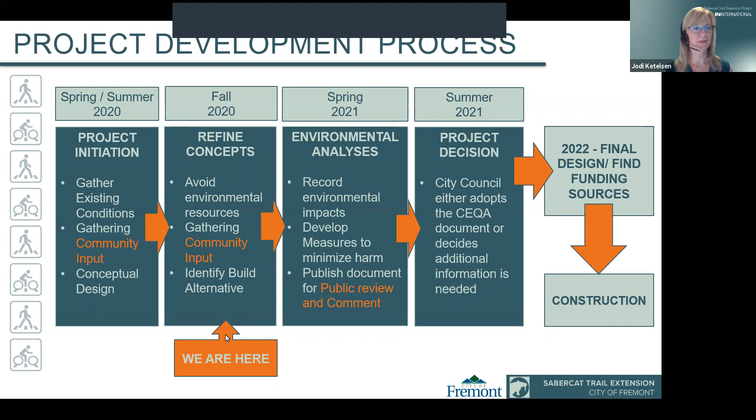So even though this is our second meeting, as you can see, there are more opportunities to be heard throughout the process. So let's dive right in.

The project setting: what we've tried to do here is accentuate key elements that are on the ground that we're working with. First and foremost, Sabercat Historical Park on our right is an incredible resource. The trail and the park itself are very loved, and there's been a vision to connect that over the I-80, I-680 freeway area. As you can see on the west side of the I-680, there's a large Caltrans right-of-way, which is still in use today.

But also bisecting that property is the Hayward Fault Zone. This is something we're very cognizant of. In fact, the city has rightfully reserved this area as not buildable—so it's a greenway. Something like a path that doesn't have a structure can very well be accommodated within that zone, but other structures are advised to be outside of it.

As we proceed further west, we have the future East Bay Greenway, which is already being planned to connect to the north as part of the future Irvington BART station. Right at the Washington Boulevard area, there are plans on how it will connect in and through the station, and eventually in the future it would continue all the way down Osgood Road.

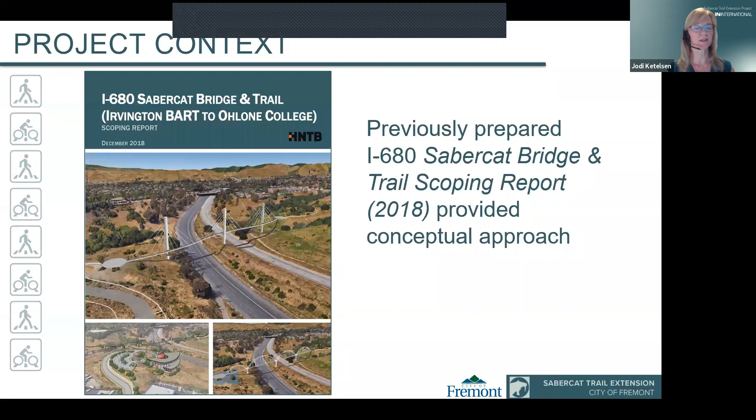So what we did in June, for those who weren't here, was present this scoping report, prepared and published in December 2018. It provided an overview, or a vision, for this project, and that's what we started with—and what we presented in June—so we could understand the vision in more detail, and understand what the public and the residents who live closest feel about this project, to give us some direction.

In that scoping report was exactly what I tried to convey here: a vision for a trail that would cross over the Union Pacific BART rail corridor, connect down at Blacow Road, cross Osgood Road, and proceed eastward into the I-680 right-of-way, which is a large mound that has been growing through the development of nearby freeway projects. It started with the construction of I-680, but has also been augmented over time.

This West Bridge landing to the middle of your screen becomes somewhat of a plaza as it continues over a large bridge over the freeway, having to have clearance and trying not to impede any of the circulation there, being outside of the shoulders, and then landing at the same grade with the park, so that all of this trail could be ADA accessible, meaning the slopes would not be steeper than a 5% grade.

There is also a vision as part of this trail to incorporate, or at least have some linkage to, the Saber-Cat Historical Park, a paleontological museum, so that one could visit the museum and then also visit the park, where these paleontological resources have been found, marking the value of that to this community. It really has made a difference in the paleontological history of how these fossils have been documented, and they are actually known for this community as the Irvingtonian era.

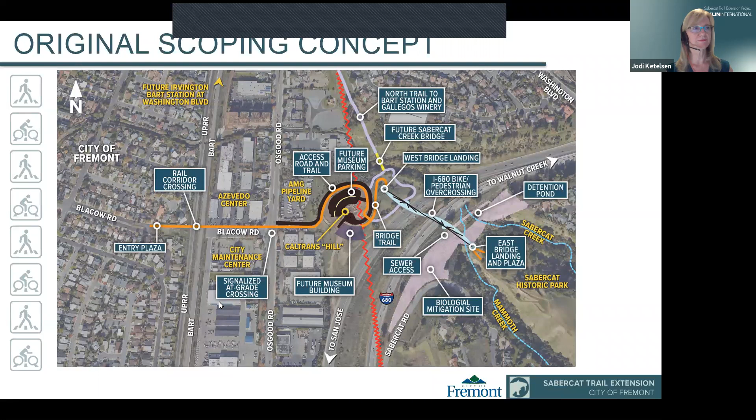We'll talk now about what we received from the public during that June period of time. We received comments during the public meeting, and we also posted a survey on the web, which was filled out by over 40, I believe 46, individuals. Thank you very much for the time you spent to provide us that input. After that meeting, we received emails and letters, and all of that has been culminated into a meeting summary and a survey summary that you can look at and review on the web. We're here today to talk about how those comments have actually influenced and are reflected in the project designs we've created to date.

For brevity right now, I'm going to review some of the major themes, and there will be more detail about the public comments as we talk about the project. So for everyone's understanding of the big themes, we heard there was considerable concern about the suitability of the existing Sabercat Trail inside Sabercat Historical Park, and how our planned extension might influence whether that would be compatible or not. The city is going to talk a little bit about that in subsequent slides.

Safety was another theme brought up quite often. Some individuals were interested in lighting and others were not. What were the hours of operation? Is it going to be an ADA accessible trail? Yes, it is, definitely. There is a lot of interest in the Paleontological Museum and how it will serve this community, and we're delighted to know there's a lot of community support for that. We'll talk more about how that is evolving right now through the project and through discussions with Caltrans.

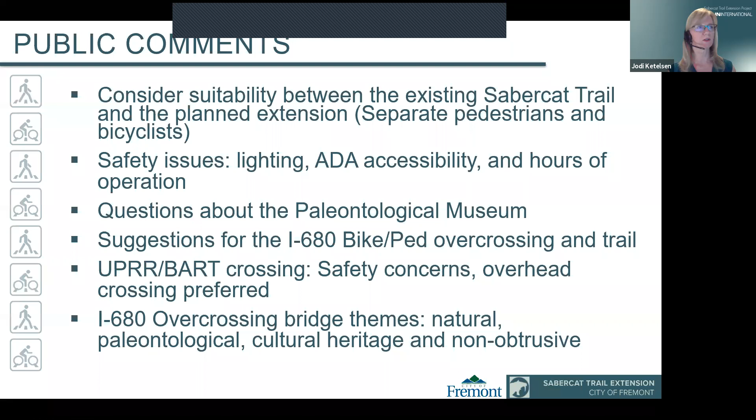So let me give you an overview again. I started from the Saber-Cat Park and went west. As you can see, the existing trail is dashed on this slide, and we would connect into it on a paved road.

There's an East Plaza, a spot identified as not as noisy. It's a little distance from the freeway, and you can stand there and still look over the entire East Bay without the freeway noise.

We've put that plaza a bit distant from the bridge, but the bridge allows you to have other views and connect over to the west, where on that mound we proceed along the more riparian portion of the I-680 right of way before we descend down.

There's a mound there, so we're descending down to Osgood. There we have the steep crossing where we delineate exactly where pedestrians and bicycles are separated in demarked asphalt, and then it continues over to the overhead bridge over the rail crossing.

Those are the areas we're going to focus on today. But again, as I noted earlier, the North Trail crosses Sabercat Creek in a small prefabricated bridge.

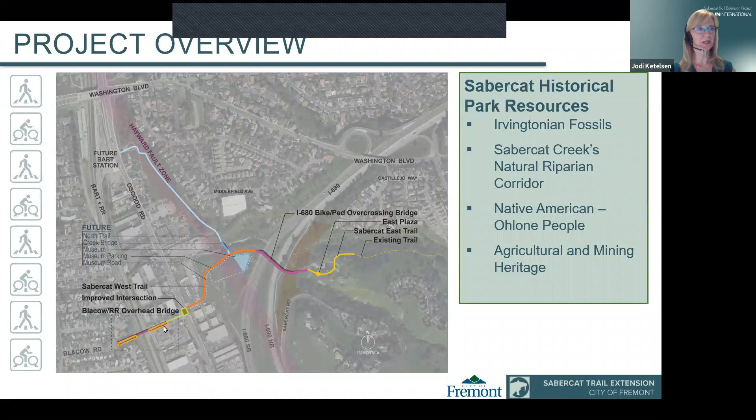But we're going to focus on the major structures along this route. First, I'd like to talk about some public concerns, and Hans is going to help me address how we think about the existing Sabercat Creek Trail.

Thank you, Jodi. One thing we heard from many folks in past meetings was the question about the suitability of the existing Saber-Cat Trail within the park. As you can see in these pictures, there are some areas of the trail that are quite narrow. The issue is, if we're going to open this up to greater use, is the existing trail sufficient? Our conclusion has been that it is not sufficient.

So included in the project now are plans to do a mitigation plan on the existing trail so that it is wider and safer to accommodate a mix of uses—people out for a recreational stroll, and others that may be biking through the area. We'll be looking at ways we can treat that.

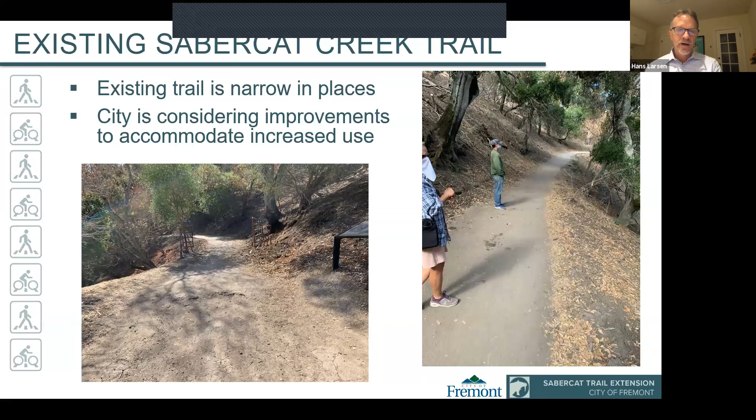It's very likely we may be moving to a 12-foot paved standard with additional room on the side for people jogging or walking their dogs, so future trail corridors would be wider. We'll be looking at improvements on the existing Saber-Cat corridor through the lens of these new standards and the expected use we would have. We hope we'll be able to address that concern.

The other thing that's come up is the variable speed of folks coming through here. We've heard concerns that folks out for a stroll want to enjoy the nice environment of the park, while also having folks passing through on a bike do so in a safe and calm manner. So we're also looking at trail calming elements that would control for folks on bikes from coming through at an excessive speed.

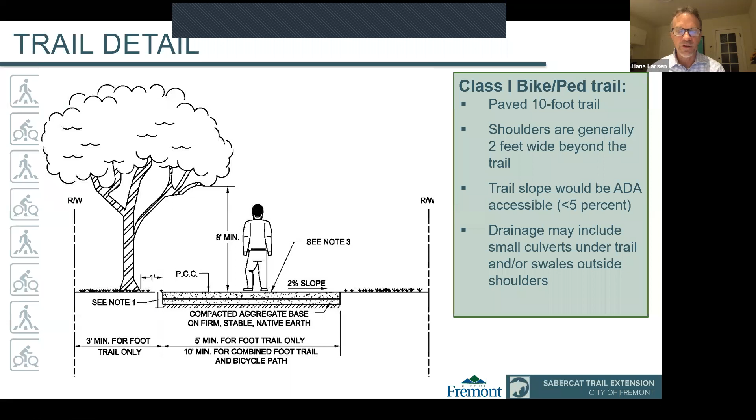There are some things in the corridor now, such as these cattle gates, that people have to go around and slow down for. That's an example of some existing calming that's out there, but we'll be taking a much closer look at those details as part of the project, to ensure a pleasant and safe environment for all users of the area. Next slide, please.

So another idea that we received, and we very much appreciate this, is a suggestion to expand the access of the new bridge over 680 to include other corridors and neighborhoods. What this illustrates is a suggestion to connect the bridge to the existing Sabercat Road and the Pine Avenue neighborhoods to the south. There have been a couple of suggestions on how to do that, and these are two examples. We think that's a good idea, worth further study, so we're including it as part of our review of the project scope.

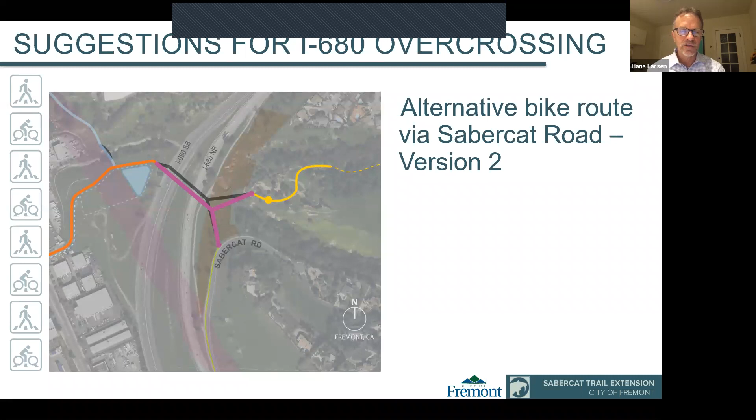We'll be evaluating that in terms of scope and cost and any issues that may be associated with that concept. So again, another example of community input that we're looking to address.

The third item I wanted to mention is the accommodation of a museum as part of the project. In our initial planning, we were looking at placing a museum on the Caltrans property just west of 680, thinking this vacant piece of land up on the hill would be a good spot for the museum.

As we've done further coordination with Caltrans, we've come into a number of complications around possibly using that land. It's part of the I-680 freeway corridor, part of the operating right-of-way on a federal interstate route, and the space is actively being used for other Caltrans purposes. There may be an issue that this land isn't available, or it would take a very long time to get approval for it. So we are separating the issues between the museum location and the planning for the bridge and the trail, so that one doesn't hang up the other.

But in the event that we're not able to place the museum at that location, we are looking at a couple of other options, illustrated here on this exhibit. One is at the corner of Osgood and Blacow, which would have access to the trail. The other would be up closer to the Irvington BART station near the Gallegos Winery ruins, with access off the northern trail.

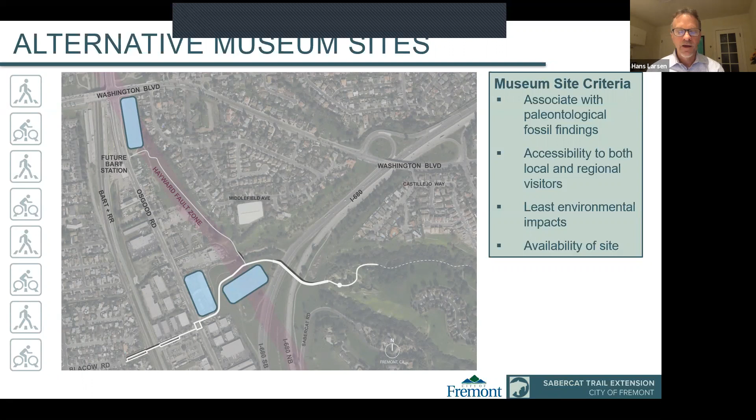So the intent is to plan a museum in the area, and we wanted to share that there are some other alternatives we're considering. We'll be looking at them from a variety of angles, and we'd love to hear any input you all have tonight about any of these alternatives.

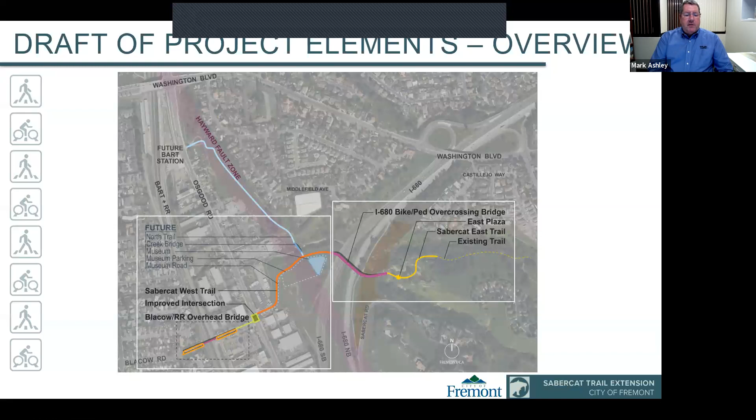Good evening, everybody. Once again, my name is Mark Ashley, and I'm working with the design team as a bridge engineer. I'm going to talk a little bit about the structures and get into more detail about the alignment we're showing here, which is our first evolution since the scoping report that Jodi talked about earlier. I'll start on the west side this time, then we'll move over to the east side. Next slide, Jodi.

So here we're zoomed in on the west side. You can see where our alignment starts at the turnaround on Blacow Road, west of the railroad corridor. We're going to cross the railroad — I'll talk about that in a second — and proceed along the other side of Blacow Road, with a protected bicycle and pedestrian intersection at Osgood. This is also where we would interface with the future East Bay Greenway Trail, which would be along the west side of Osgood.

Then our trail would extend over to the Caltrans right-of-way that Hans just finished describing. It's a triangular piece of open land being used right now for Caltrans earthwork operations for 680 projects and other projects in the area.

So what we're trying to do is align the path — Jodi, if you go back — along the perimeter of that property, the west leg and then the north leg. That allows us to leave as much space as possible for Caltrans' continued earthwork operations. We are going to need to get their permission to have the trail pass through the state right-of-way.

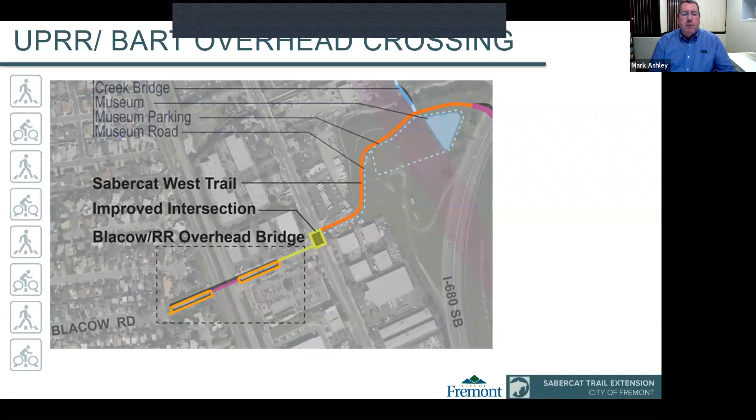You can see the Blacow turnaround. We'd start the path more or less in the middle of that to stay as far away from private properties as possible. We then would have to cross the railroad tracks.

In the last meeting, we presented two options: going under or going over. We've opened a dialogue with both BART and Union Pacific Railroad, and what we found is really the only thing they'd consider in this case is going over. They're very concerned about the impact of tunneling under their tracks and what effect that might have on their operations. So that's what we're showing, what we're moving forward with at this point.

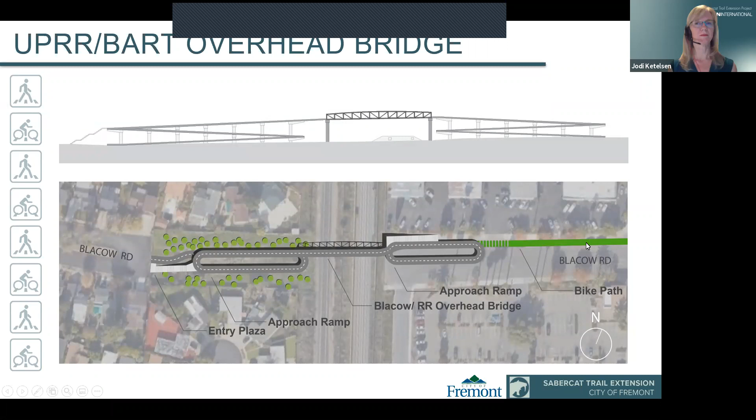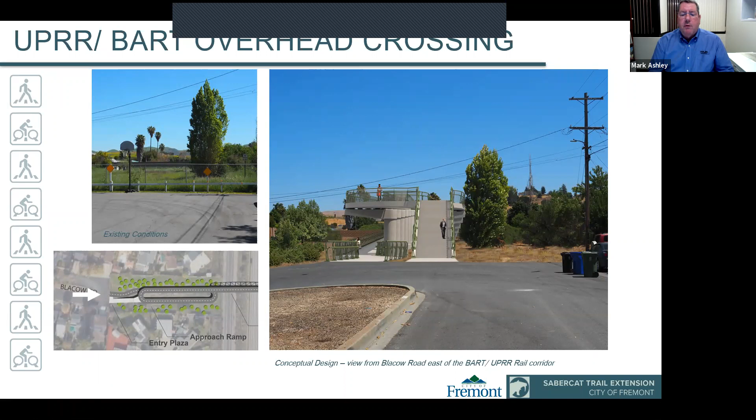These are just other views. Top left, you can see the existing condition at the Blacow turnaround—this is where our project would start on the west end. In the right-hand view, there's a visual simulation of the stairway and the ramps going up, showing the amount of buffer area we'd have on either side that could be landscaped to provide a buffer to those existing private properties on both sides.

What we have here is we're bridging over it. We're going to attempt to not put any permanent structures down within that brown shaded area and even minimize any temporary impacts. That will be one of Jodi's challenges, to work with the resource agencies—this is regulated by the California Department of Fish and Wildlife and the U.S. Fish and Wildlife Service at the federal level.

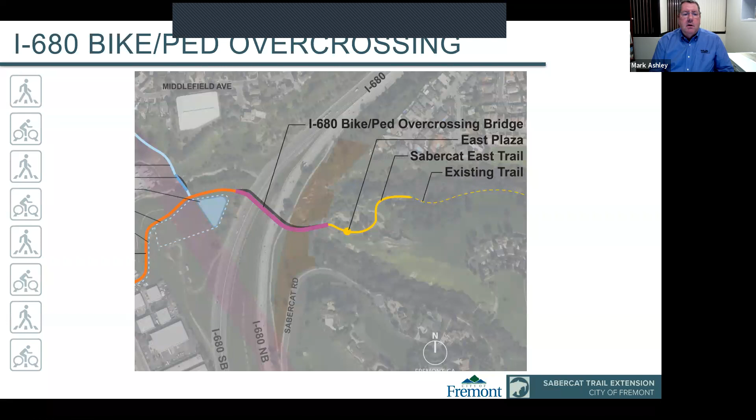So with that, the bridge was shown in fuchsia on that slide, and now this is the bridge, kind of this S-curve. I want to introduce our bridge architect, Noel Shamble, to go through his process and some of the design concepts he's come up with for that crossing of I-680.

Noel? Yeah, great. Thank you very much, Mark. Delighted to be here to share these ideas with you all.

Continuing Mark's fuchsia theme there, I'll direct your attention to the fuchsia text on this slide. This is a slide I showed last time in our first community meeting, illustrating the design process we like to follow for our bridge projects. First, before we get into too much conceptual development, we like to sit down and think about a theme. A theme is really our way of packaging many different aspects of what are going to be the guiding principles of the project.

So those could be the character or the values or things like that. And ideally, we adhere to that theme all the way through the project, and that helps us resolve a totally holistic vision in the end.

So we shared some themes. If you just go back real quick, Jody, I'll just talk about -- sorry. So after the theme, we go into concept development, and then detail development. Right now we're right there at the beginning of concept development. So we're going to recap what we heard about the themes and then present some of those early concepts.

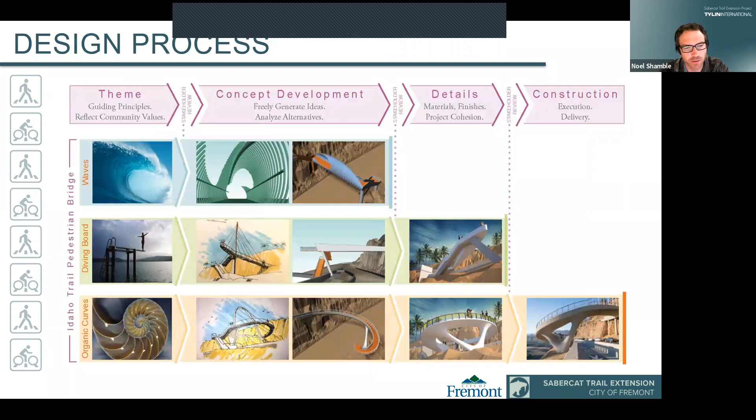Last time I presented a couple of quick themes that made sense to us for the site: of course, the SaberCat heritage, paleontological inspirations, anything from fossil bones to more geometric, rhythmic shapes, more contemporary interpretations of those sorts of things, as well as the natural history of the setting. And then we threw out other things to discuss, such as the kind of contemporary architecture that's being built in the town and more largely in the Bay Area as a whole.

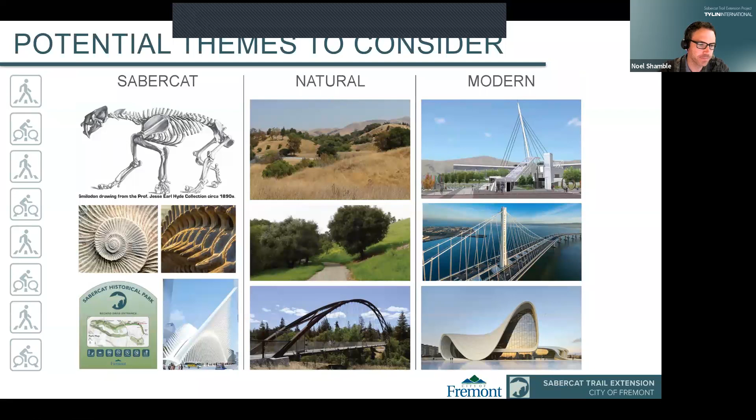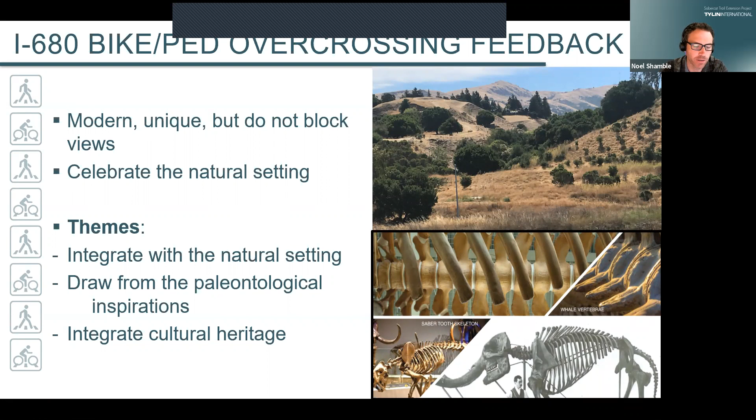So what we heard back from you guys was some great input. We definitely heard that people agreed it made great sense to connect to that SaberCat theme, to that fossil kind of bone iconography, whether that be more subtle or more literal. We're varying the options on each concept. And then we also heard that people want to integrate the bridge into the natural setting as much as possible -- not just integrate it, but elevate and celebrate what a great resource that is.

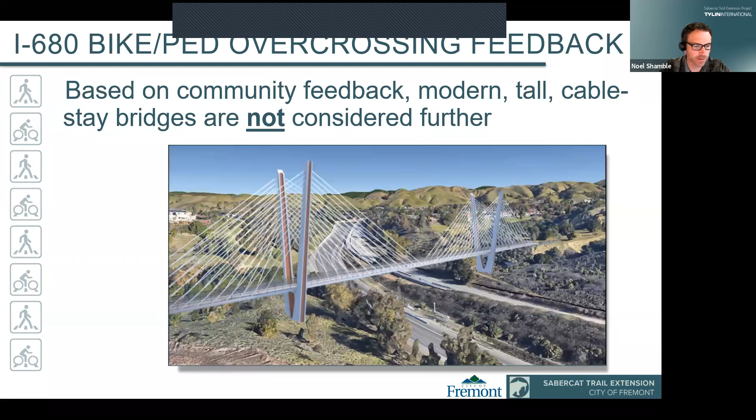With that in mind, in a more practical sense, we heard things like taller cable-supported structures, such as this cable stay bridge, people would rather not have considered because it's just too imposing, too tall on the site. So we've decided to move away from tall cable-stayed structures such as this, which leaves us with some exciting concepts to show you.

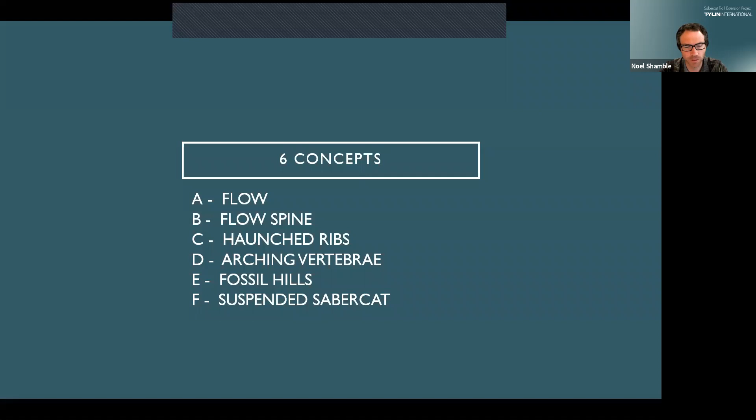So we have six concepts I'm going to walk you through, and they range in complexity from a little bit more simple to a little bit more involved. Jody's going to kindly click along a slideshow while I narrate over the top of them, and we'll start off on the simplest end of things.

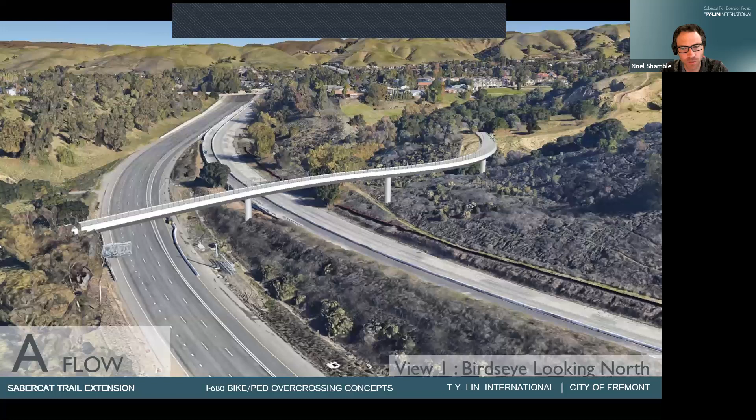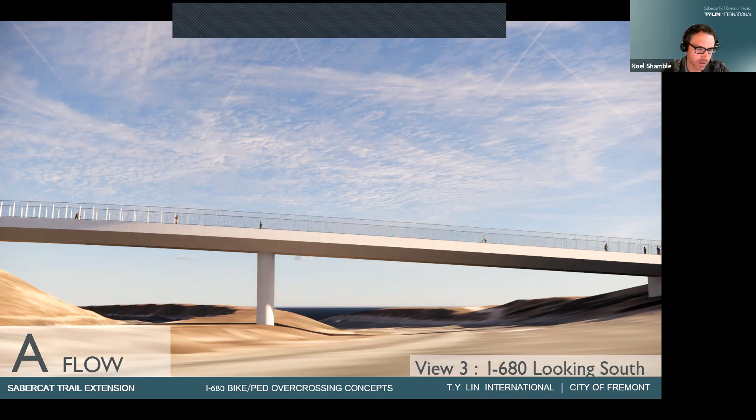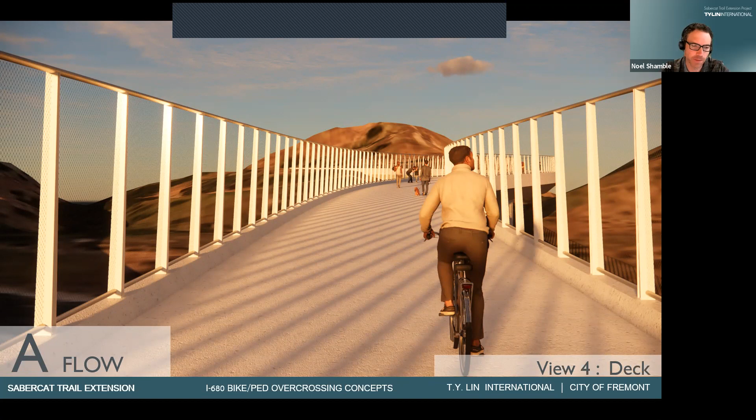Now, of course, being bridge designers, we want to strive for a little bit better than that. So we hope that we could detail it with some nice corners and materials that would elevate it a little bit. So this would kind of be your clean, simple, and elegant type solution.

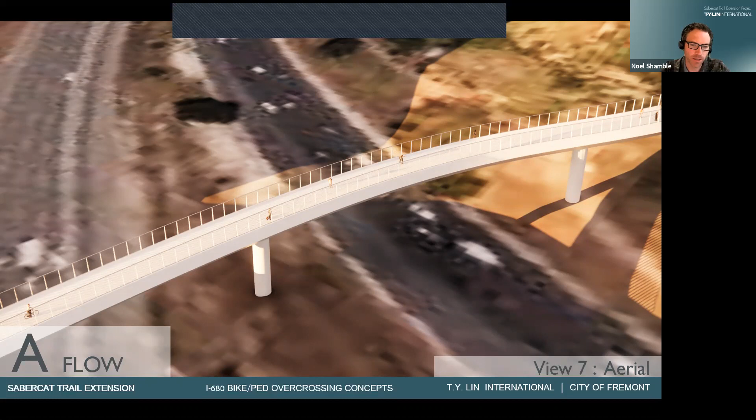It's worth noting that on all these concepts, we do have a requirement to have an 8-foot fence protective barrier over the Caltrans highways. So when you're thinking about the views you'll have out over the bay, that will certainly be something to consider.

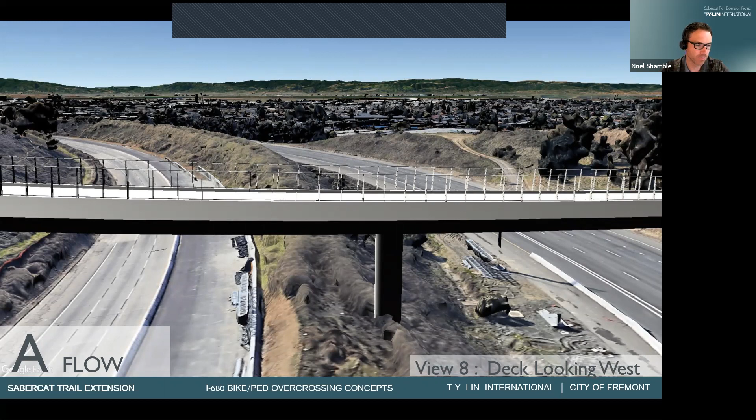So here we have the last view, that view from the bridge deck looking out towards the valley. That fencing material will strive to be as transparent as possible. And as we merge the bridge into the landscapes on either end, as we leave that space over the freeway, we can blend those fences down to more of a traditional railing height. So it doesn't necessarily need to be that tall the whole time.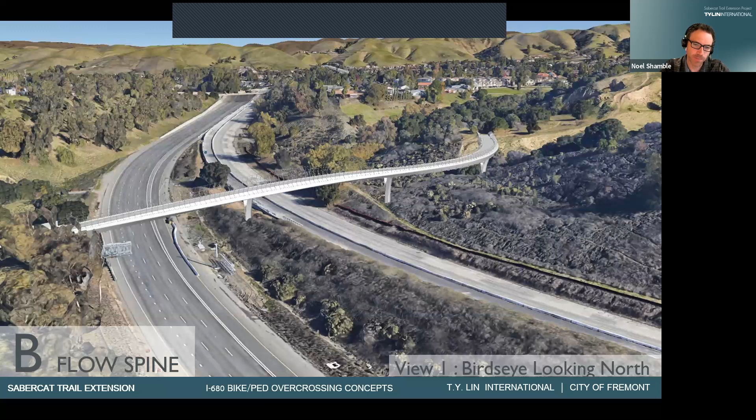Now, taking a step up from that baseline level, we have the flow spine. This is the same sort of structure type, but now we're trying to add a few little bits of flair to it, kind of punch up that Sabercat iconography a little bit more.

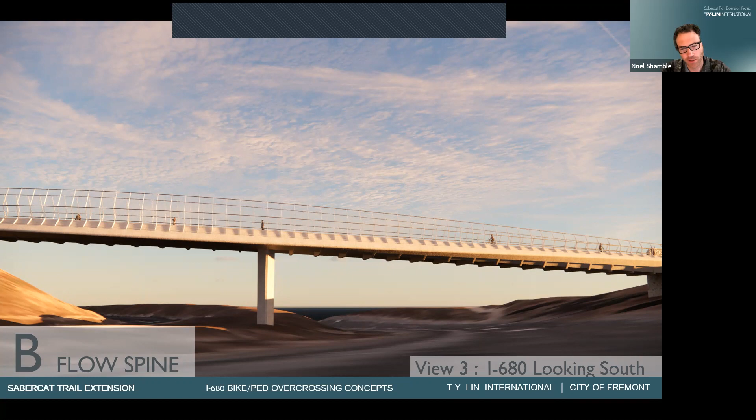So we've added a little bit of a dynamic rhythmic system to both the fence structure and to the underlying structure type itself. You can see underneath we have a series of repeating ribs, and then the fence itself is a very dynamic fence post that can actually change over the length of it.

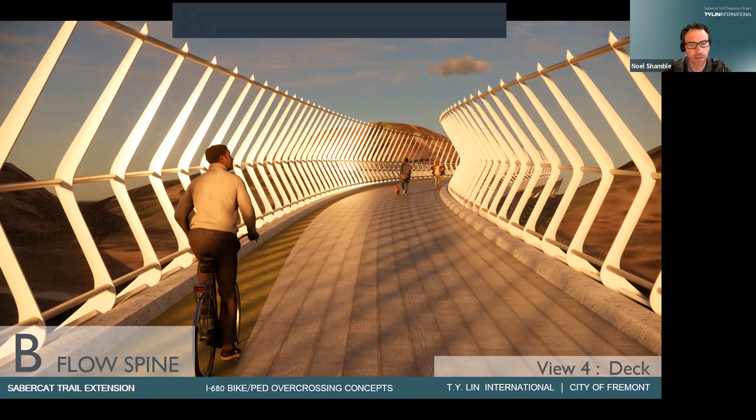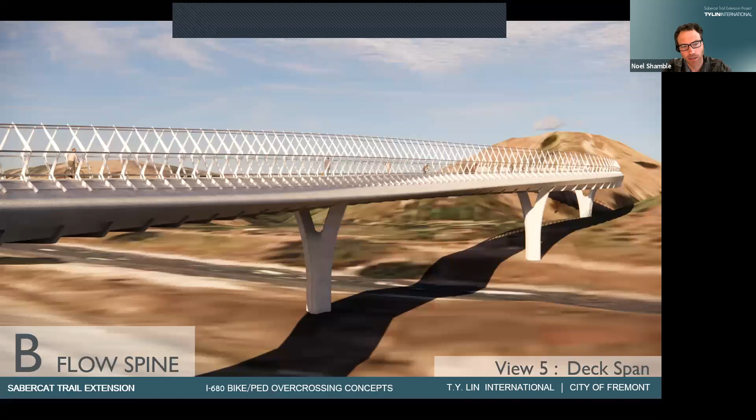As I mentioned, it's taller where it needs to be over the highway, but then gets shorter on the approaches on either end. And then this striking, nice undulating edge curve line, rather than being straight, morphs up and down across the length, giving it a really dynamic and lively, sinuous effect.

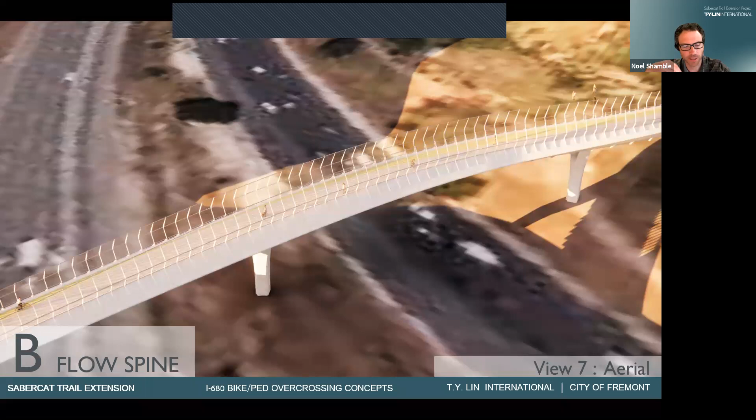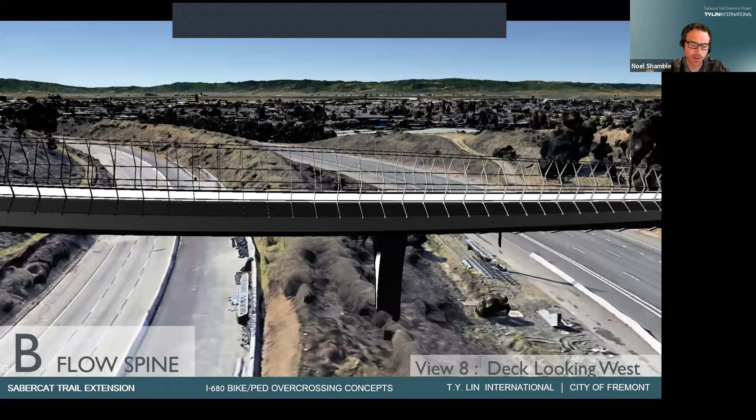Really connecting the eye from one side of the highway to the other, all in one fell swoop. But still, hopefully, kind of understated and subtly iconic is the goal for this one.

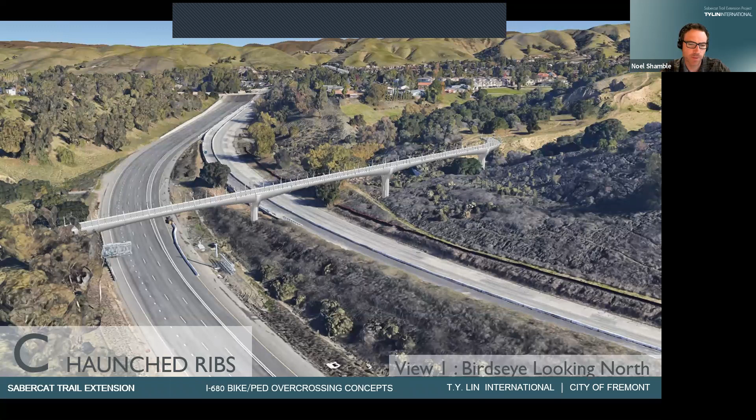Now, still within that same concrete girder family, we have version C, which is the haunched ribs. So now we're looking at slightly haunched girder spans, still multiple spans. Because these spans are haunched, we don't have the extreme flexibility to make those smooth S curves like the previous two, but we can still curve things a little bit because there are numerous columns.

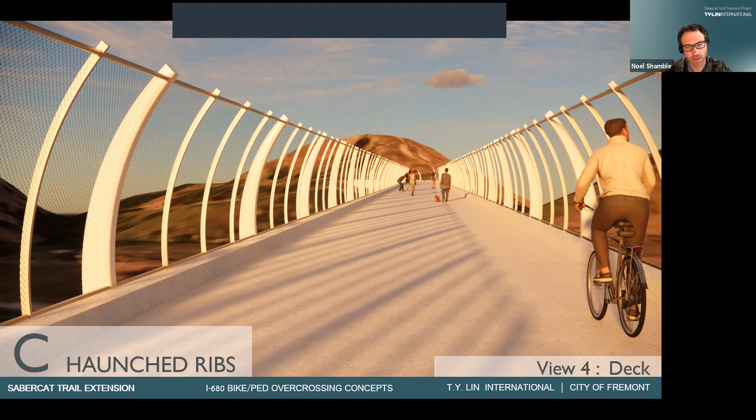And then to try to play up that Sabercat fossil idea a little bit more, we've added a rib structure that comes up to the fence. In contrast to the previous two, this one looks at more rounded shapes, more curves, and softer edges, just to provide that alternative vision for you guys to look at.

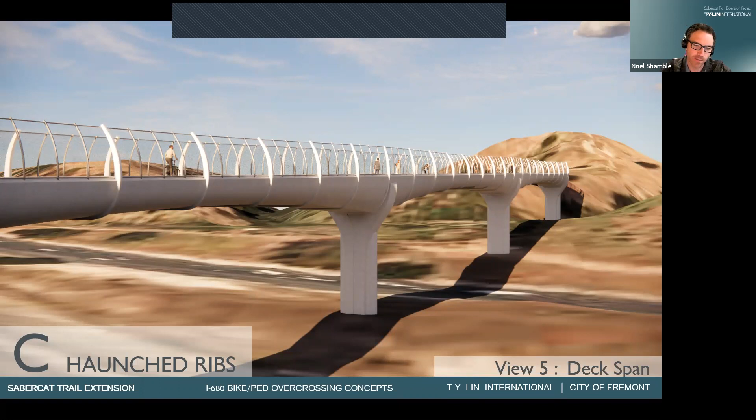Now with these next three, at the halfway point here, we're going to ramp it up a little bit in the complexity department.

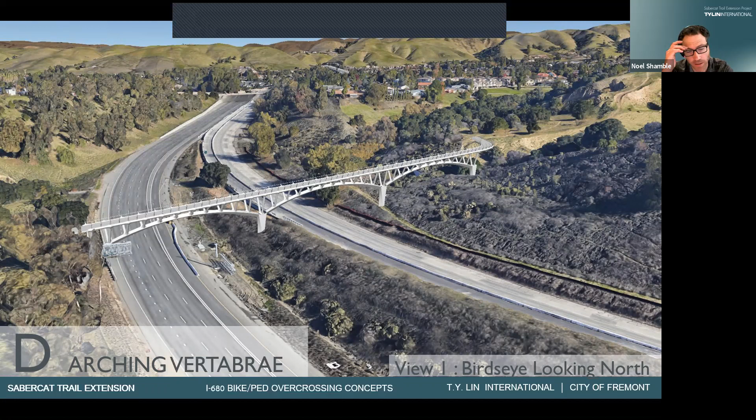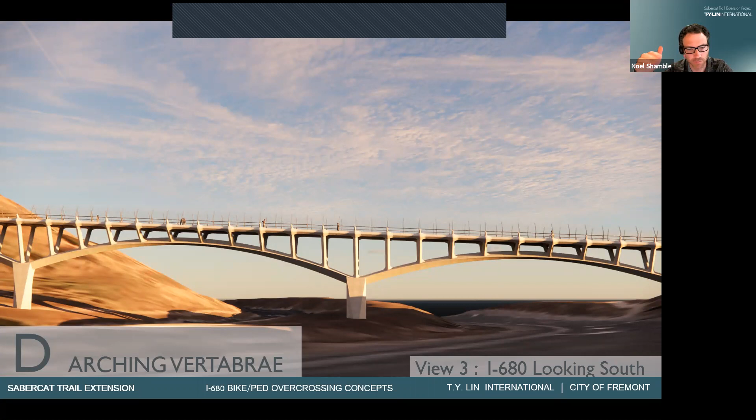This is now an arch structure, but we're arching below deck. This is actually a structure type that's common historically in bridges throughout California, the spandrel arch. This is a concept that takes advantage of the site we have here. We have a really high walking path relative to normal crossings we would do, so we do have a lot of space below the bridge deck to play with, a lot of leeway for where we can put that structure.

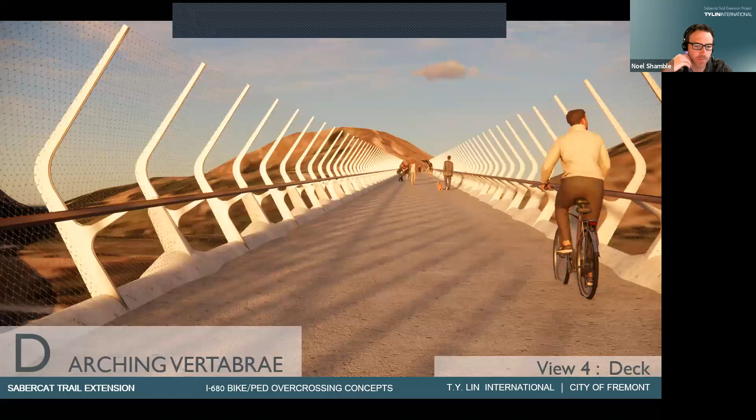Our idea here is to take those vertical support spandrels, those legs on top of the arch, and detail them to play with that Sabercat iconography, making it look more like a vertebrae or spine type system.

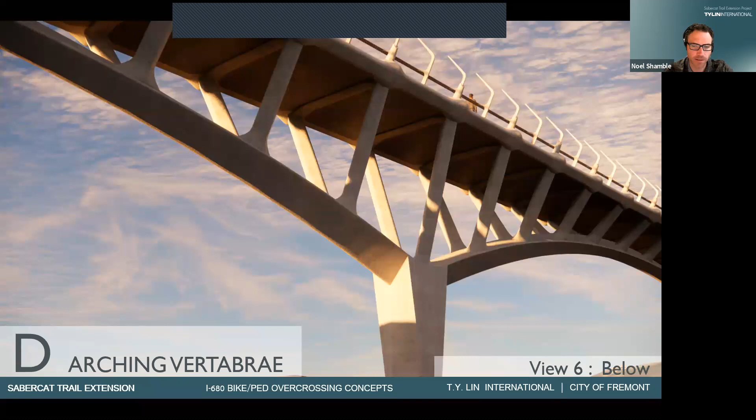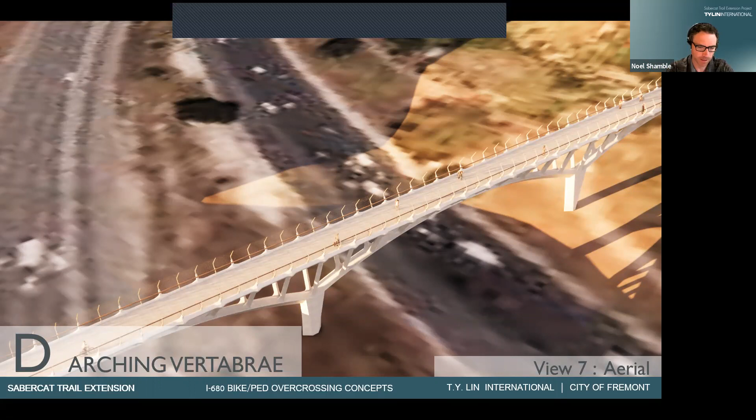It has a lot of light and shadow play that would create a really dynamic silhouette, constantly changing depending on what time of day you're viewing it, what time of season. And even though it has its roots in historical forms, it's definitely something that is very unique and not seen before.

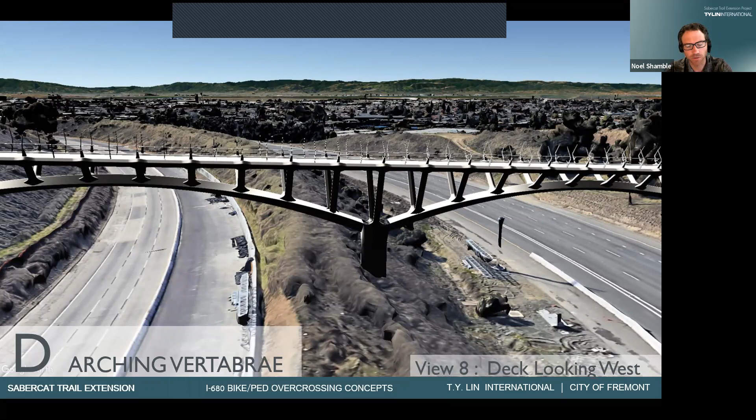And the benefit of putting a lot of that structure below the deck is you still get those great views from the deck looking out towards the valley.

Now this next structure type, we start to take away a few of the piers, a few of the columns, and so we have larger spans. The advantage here is that we can more easily branch over or bridge over some of those tricky challenges, like Mark mentioned, like the mitigation area and things like that.

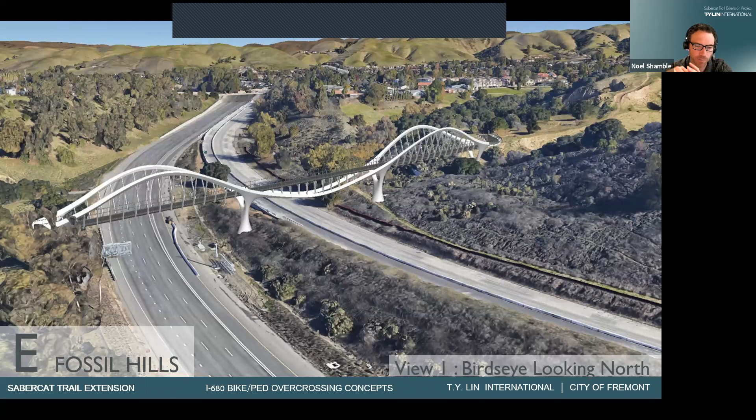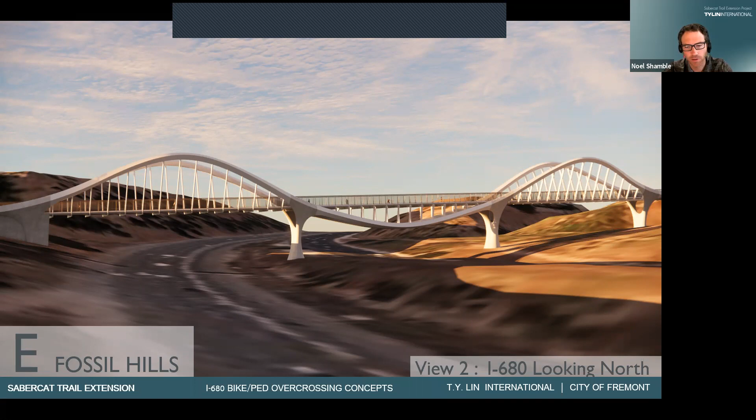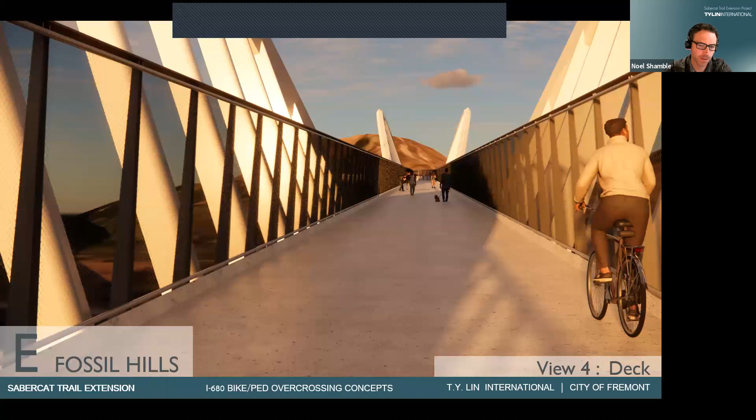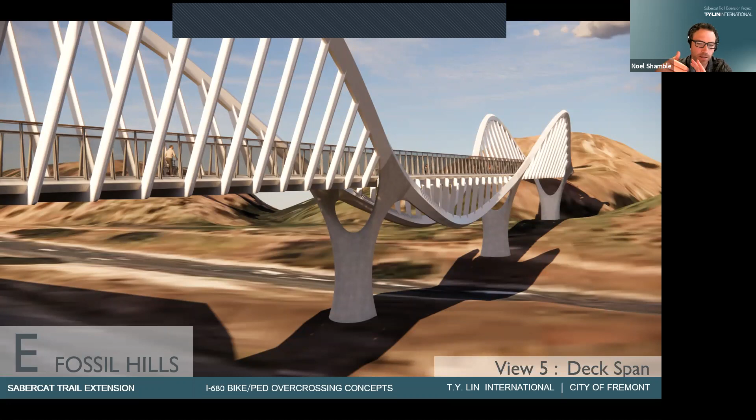So here we have a 3-span structure that is a hybrid structure, with arches framing on either side and an underslung suspension system in the middle. This really creates a very unique, iconic structure that's dynamic, always changing depending on what view you're looking at it from. For this, we drew inspiration not just from the opportunities the site allows us with clearances, but also from the rolling hills of the adjacent natural setting, and the secondary structural members try to create that repeating rhythm of the Sabercat fossil idea.

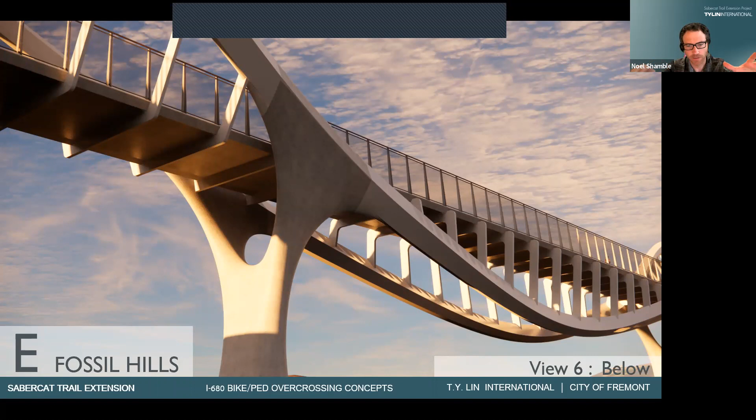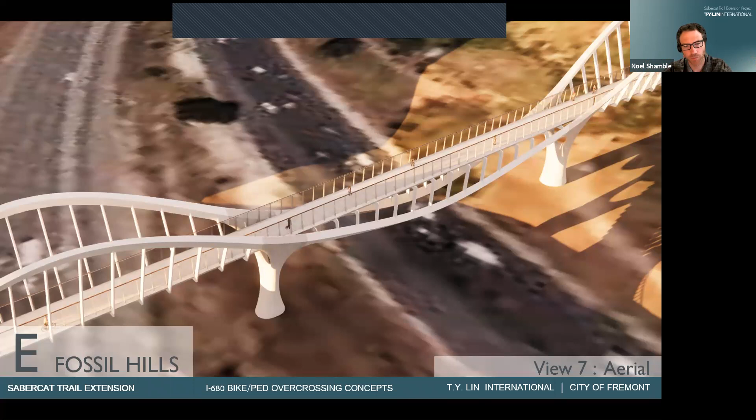This one has structure both above deck and below deck, and the idea is that as you walk through it, you're having a dynamic experience where you're enveloped within the structure at some points, then you get to the middle of the span and the structure drops away and you get this grand view out over the bay, and then you're brought back within the cathedral of the space again, shifting spaces as you go through, which is great to mix up a longer span like this. A span like this would be better suited to a straighter alignment because these components are all connected together in a row.

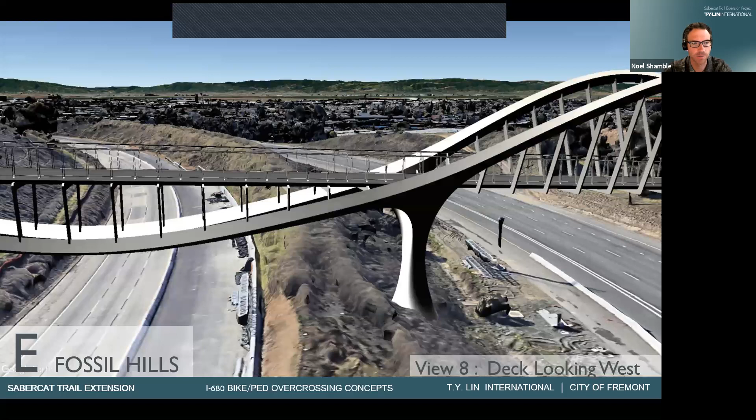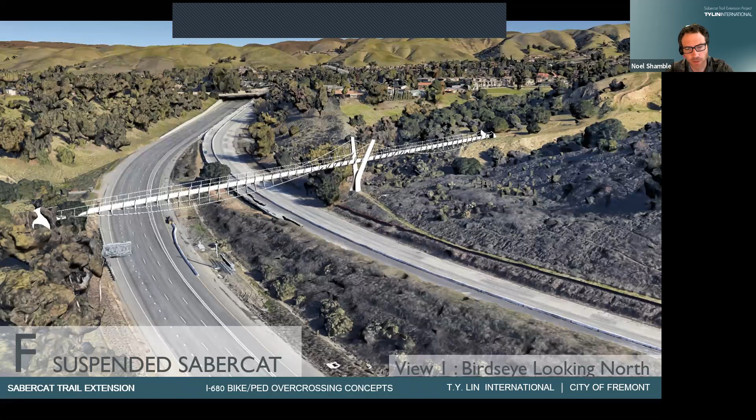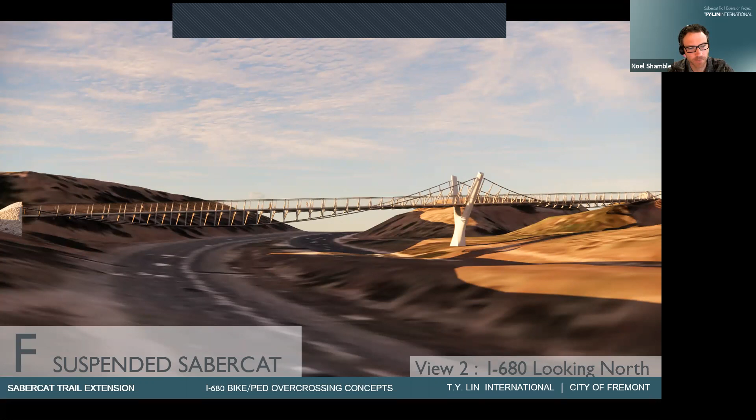And then finally, the suspended SaberCat concept. This really arose out of an idea to touch the land as lightly as possible and also be as transparent as possible. As I mentioned early on, right off the bat we wanted to go away from tall cable-supported structures, but there is a structure type here where we can use a suspension type structure where we undersling the main cables below the deck and take advantage of that large clearance we have over the roadway, then use a secondary structural system of ribs to hold up a very light and thin deck.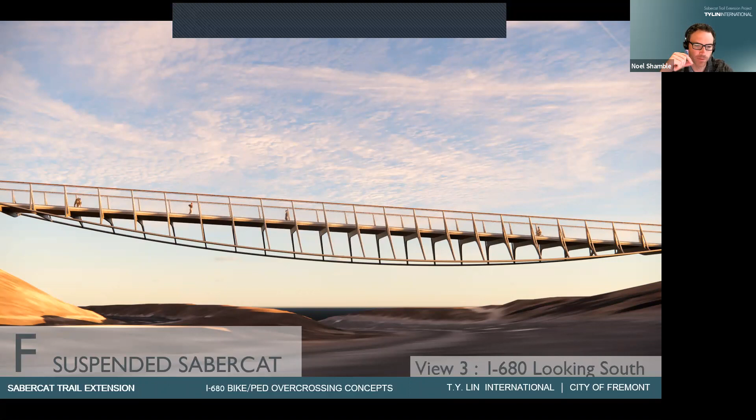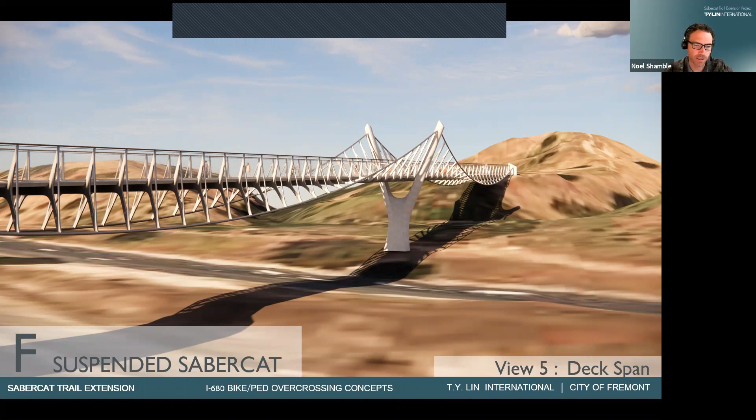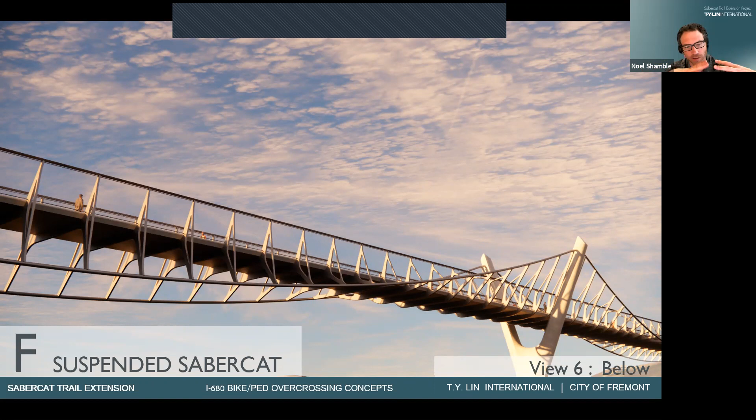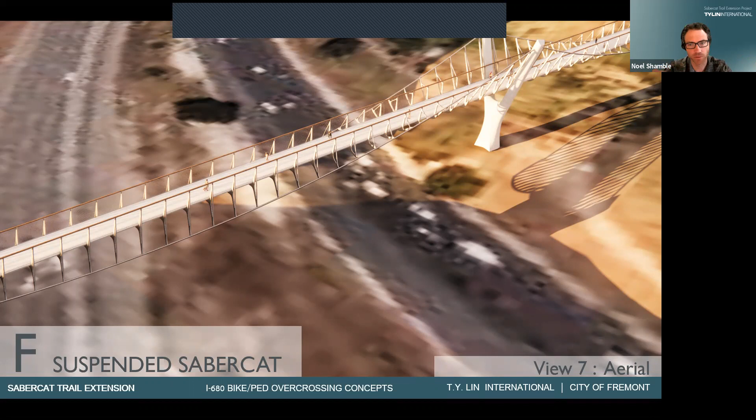So not only are the cables light, but the deck system itself is much thinner than those previous girder concepts, those three at the beginning. Again, we get a really dynamic structure across its length because the angle of incidence, the angle of connection at each point is slightly changing. Every little rib is changing, and so as you go through it, you're in this fluid, dynamic experience that goes from more open and exposed, where we have great views, to a little more enclosed next to the tower, and then back out again.

And again, this concept, because it is so direct, works best on a straight alignment. It also has inherent challenges with anchoring on either end of the abutments, anchoring those cables. But overall, it's definitely a striking idea, and would be something not only unseen in Fremont or the Bay Area, but even worldwide. We do projects all over, and these last two concepts would certainly put Fremont on the map globally in that sense.

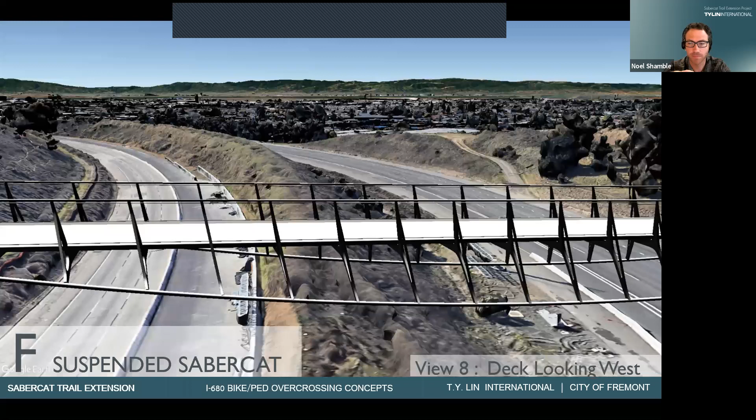Now, to compare them all real quick, we've listed them all here. I'd say the top three could be categorized together, those three girder types—they're all going to be about a similar family of costs because they're simpler structures, with more modest cost. Alternative D is going to be a next step up, both constructability-wise and cost-wise. And then E and F are going to be topping out the complexity and therefore the cost as well.

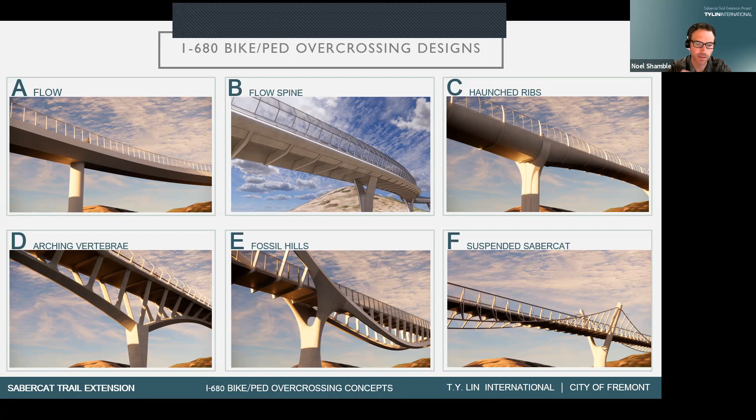And here's the text version of that rundown, that synopsis, for people who don't get to hear my eloquent descriptions and are just reading about this later online. But I'd encourage you to read through some of these details—the column placements, the cost, and the alignment, as well as the more dynamic and stylistic features of the concepts, are all different. With that, it's been a pleasure generating these concepts and working off of your feedback, and we look forward to getting a new round of feedback and continuing to refine what we have going here moving forward.

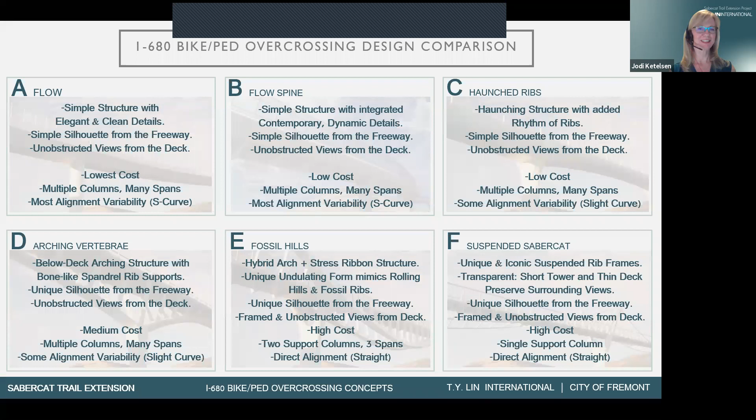Great, thank you very much, Noel. It's hard to top that lovely presentation because my slides are not as much eye candy as that.

But I also wanted to make sure to talk a little bit about the environmental effects that we are evaluating.

We've done some draft, some are not yet complete, so I don't have a lot of information to offer you. But I wanted to make sure these were listed in front of you, in case there's a piece of our studies you'd like to contribute to. I want to put a big call out to Joyce Blueford, who has amazing resources and knowledge of this area, and has already been valuable in consulting on paleontological as well as cultural resources found in the area.

And that is just one example of the resources found inside your community. We're doing our best to bring our specialists in to provide as much accurate and detailed information about how this project will interact, both beneficially as well as impacts. And those impacts we are identifying as early as possible.

Even prior to developing these designs, we delineated habitats and various resources to avoid, so that we can, in essence, thread the needle and try to be light-handed on this beautiful resource that you have. So habitat, wildlife species, water quality, the drainage, paleontological resources and cultural resources I already mentioned, traffic.

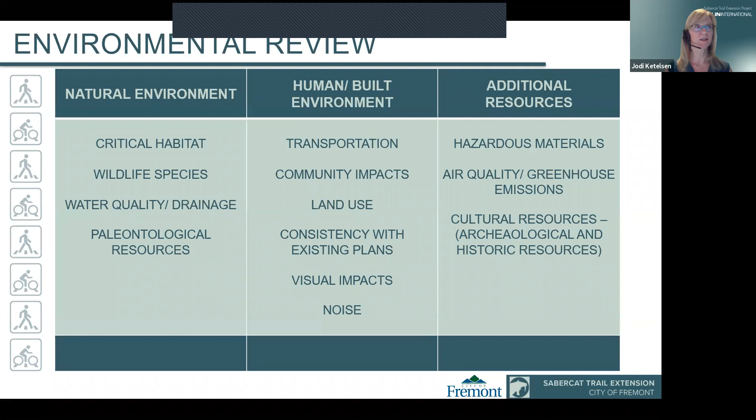By way of finishing up here, I just wanted to make sure you understand that we do take your input very seriously, and I hope you've seen a lot of that reflected today. Like I said, we initially gathered input in June and July, and we've gathered and posted that information on the web for you. Here we are again today in the fall, trying to collect more information, both verbally as well as all of the chats.

Anything you've written will be recorded and collected. And again, we encourage you to email and write. As we refine the project and further avoid and minimize impacts, we will be proceeding to pull together an environmental document, which should be out in early next year. And then we will ask for your review and comment then as well.

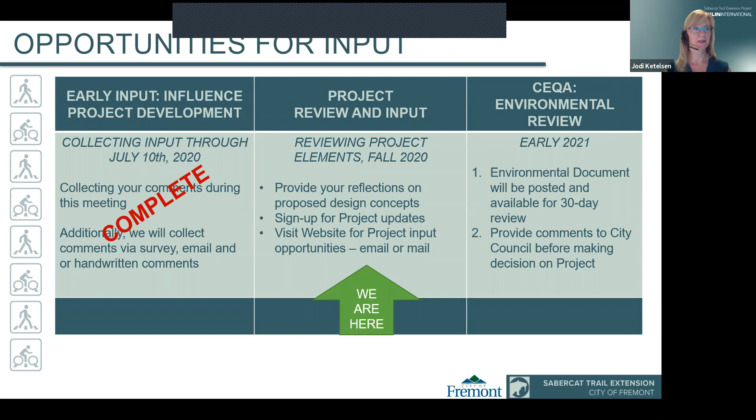But if we were to just focus on the comments we hope to obtain today, we are providing a 2-week window. That does not mean you're limited to the 2-week window. It just means we will collect comments through November 5th and try to distill those into a summary, so we have at least a point in time where we've collected your input. It's always good to have a target to receive your input, but that is by no means your last opportunity.

Also, there's one person with their hand raised. Oh, I did not see that. Yeah, so I'm going to allow... oh, actually, looks like he's left. Okay, so that's it. Okay, great, thank you very much.